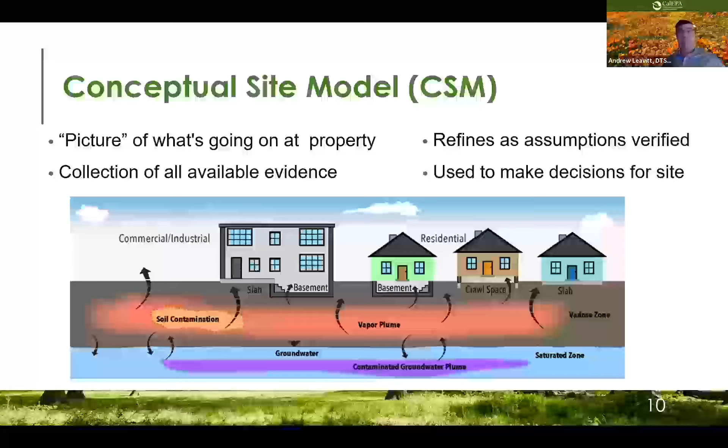So what should the cleanup process look like for a typical site when applying the holistic approach? Well, it'll start with the site investigation phase, using all the tools in our VI toolbox, which I'll discuss more in a bit, to collect the necessary data or lines of evidence, to more efficiently build a robust CSM and delineate the source area.

While complete characterization remains important, the holistic approach puts an emphasis on source area delineation so we can remove it and be more protective of human health. It also allows us to be more targeted when making data-driven decisions about monitoring well and probe networks, which can quickly deplete budgets and drag out project timelines.

Once the source area is delineated, we want to remove it. The methods of doing so aren't anything new. We're just trying to get there earlier in the project lifecycle.

We also want to put a greater emphasis on short-term mitigation measures to address more urgent concerns to human health, particularly during the investigation and source removal stages. When indoor air concentrations indicate their need, we've always taken these actions. We simply want to make sure the project teams are prepared to use these measures, particularly when something like sealing up a few cracks may greatly reduce human health risk without depleting a project's budget.

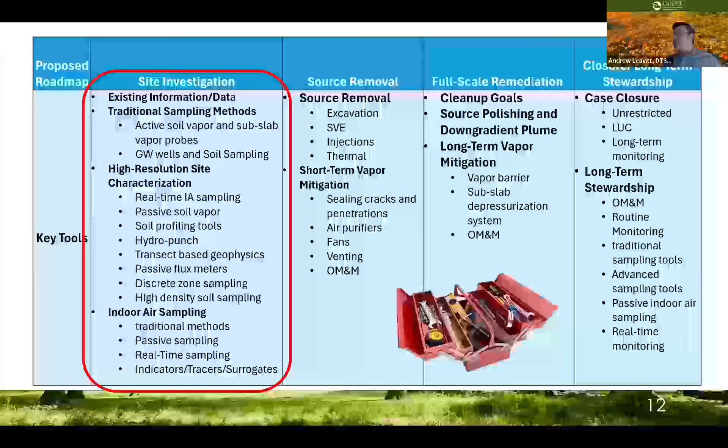While it can be expensive and has limited application for soil vapor sampling, real-time monitoring tools can be cost-effective and are great for evaluating preferential pathways, VI patterns like temporal variability, and differentiating between background sources and VI, which could answer why the mitigation measures weren't working.

When we look at source removal and full-scale remediation, none of these tools are considered new or advanced. These are tools that we've been using for years. We are simply trying to use them earlier in the process to be more protective of human health.

It can also be noted that many of the tools used for site investigations may also be used for long-term stewardship.

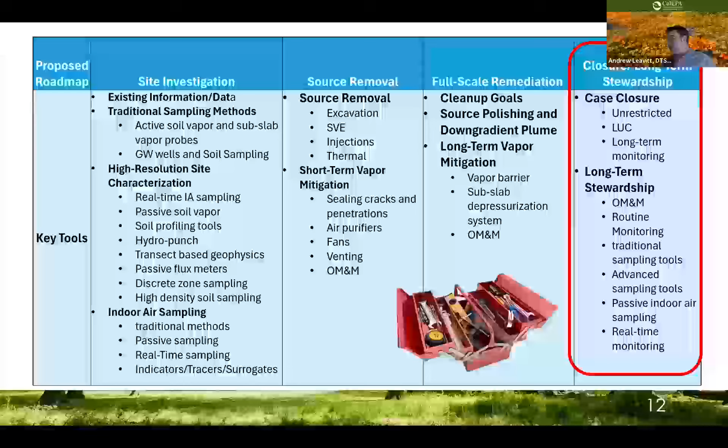I want to make it clear that we understand that every site is different, and therefore not all of these tools will work at every site. There are exceptions for every technology, but if we look again to the site investigation tools, for example, many of these tools will work at a large number of sites. The toolbox is vast and gives us options. We simply want to see the most appropriate tool chosen for the task at hand.

And I also want to note that a great source of information for evaluating VI is ITRC's recently published VI Toolkit, which a link has been provided for in the chat. Next slide, please.

So how do we build the robust CSM? Well, we use multiple lines of evidence. So lines of evidence, or LOE, are all of the data and information that exists for a site. Each LOE should be weighed based on relevance, or how much an LOE helps to answer the question being asked, representativeness, or does the information accurately replicate the actual conditions, and quality, or was the sampling or analysis performed using acceptable protocols.

The same LOE may be weighted differently for another site, a different building at the same site, other scenarios for the same building, like change of condition or operation, or even for a separate sampling event within the same building or same site. In other words, context is critical.

For example, you collect indoor air data in a building at your site. But how useful is that data?

Have you collected enough to account for both spatial and temporal variability? Have you collected paired sub-slab vapor data? If yes to both, your data may hold more weight. But if redevelopment plans have the building being demolished and replaced with a new one, that data holds much less weight.

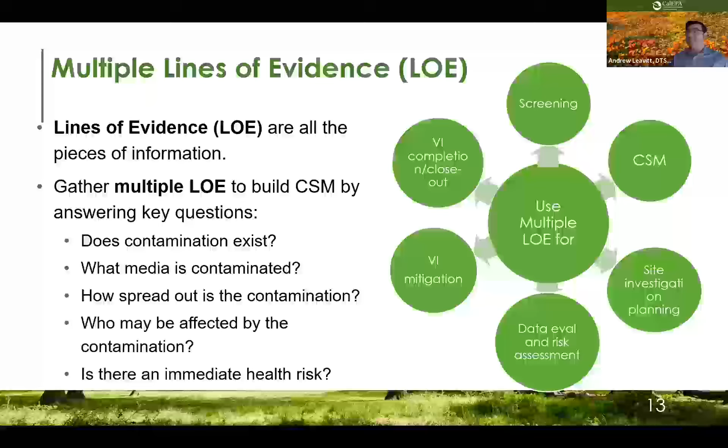As a CSM changes and gets refined throughout the entire lifecycle, so do our DQOs. The DQOs we establish first tend to be more broad. These are the big questions mentioned on the previous slide, like: is contamination identified? What media is impacted? How spread out is it?

Who's affected? As the project progresses and we meet these DQOs, additional, more specific questions must be established, like: is there a complete vapor intrusion pathway? Are there potential preferential pathways? What is the human health risk? What is the geology and hydrogeology of the subsurface?

One DQO that is important and interfaces with our risk-based decision-making process is whether or not to set a preliminary goal for indoor air, like a hazard quotient of 1 or some other defined risk level. To meet this DQO, we may initiate source removal and/or short-term mitigation measures, but it's important that this be done while continuing site characterization beyond the source area.

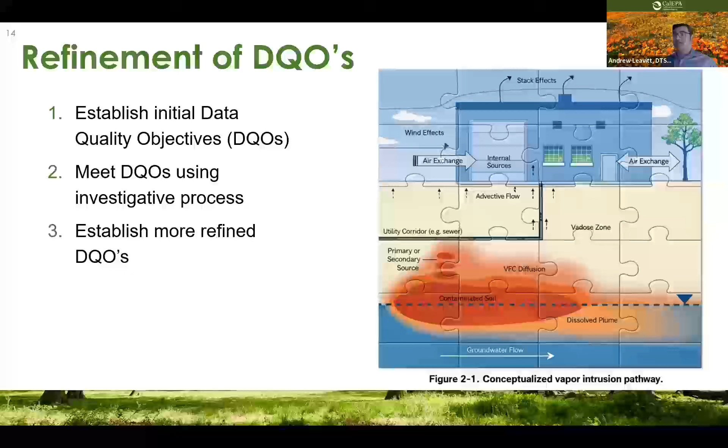To sum up, what are some best practices for a successful vapor intrusion case? Well, first and foremost, it's the application of a more adaptive approach to case management.

So we raid the VI toolbox, use the appropriate tools to collect LOE, and build a robust CSM. Then we use the multiple LOE approach with that CSM to support data-driven management decisions throughout the project's entire lifecycle. This will help achieve the goal of more quickly evaluating and addressing potential VI health risks in a more cost-effective manner. Part of that adaptive case management is optimizing early source removal to be more protective of human health and utilizing short-term mitigation measures to address more urgent risk concerns.

Next is engaging with the community early, often, and in a clear manner. Starting that discussion from the get-go may avoid major delays down the line.

For public stakeholders, we want to make sure communication is transparent and collaborative. This will help ensure that both regulators and regulated have a common understanding of the site, contamination, potential risks, and risk management actions that may be taken to reduce those risks.

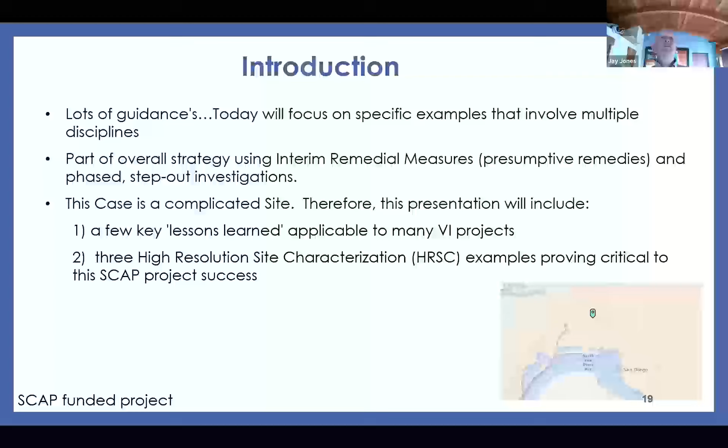All right, so the site's located in San Diego. We're just north of the airport. The dotted blue line you see there is where San Diego Bay used to be. All the land where you see the airport was hydraulic fill, dredged from the bay to make the bay more useful. So our site used to be next to San Diego Bay. It has some importance because this means this is really just a VI case only. We have non-beneficial use designation for groundwater, so we're not worried about drinking water. We really are focused here on VI.

Okay, so this is an example site. It's a former dry cleaners, kind of a classic case. If you work on dry cleaner cases, you'll see some of these come up from time to time. This one started in the early 50s, operated almost into the early 2000s. There were 2 dry cleaner locations over time within a building, and the building was expanded over time. A conspicuous feature of this site is that there was a 100-gallon above ground storage tank filled with PCE, tetrachloroethylene, used for gravity-fed dry cleaners, with disposal to floor drains. It was all legal, for many years. We don't have data on this, but it's also combined with a lot of conventional washing, so there's a lot of soapy water combined with the PCE over time. So we have pretty good historical data, which I'll go through in a minute. Early on, we suspected there was lots of PCE. Our initial estimate was about 2 metric tons, 4,400 pounds of PCE in the ground. After high resolution work, we estimated probably on the order of 6 metric tons. So it really tripled, which shows you the importance of the HRSC.

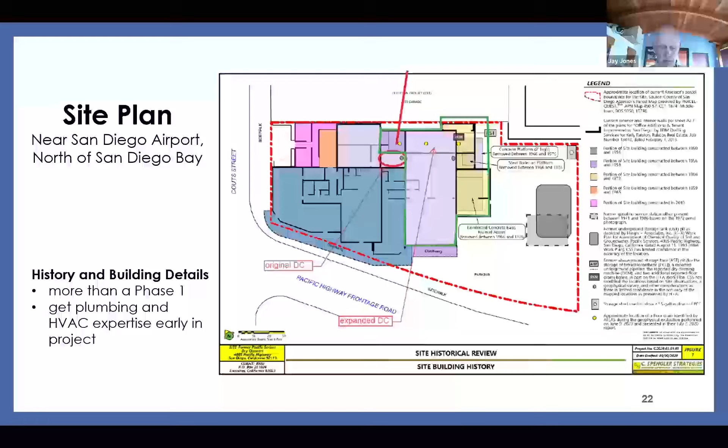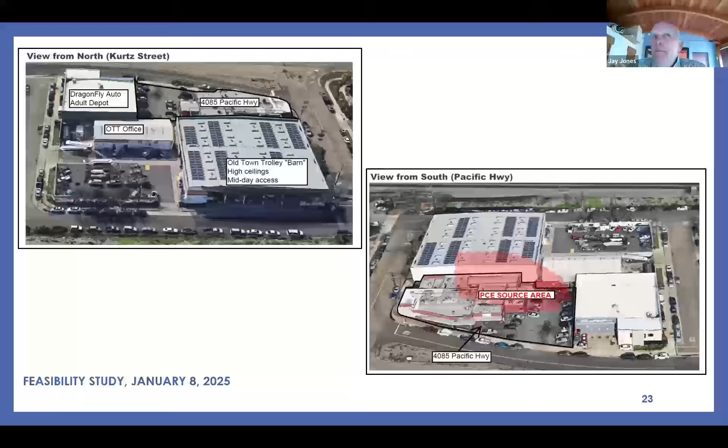All right, so here's a picture of the site. The lower right shows what we call the PCE source area. The building I just showed you is in the lower left corner. There's multiple properties on this block. We're involved with investigation, mitigation, and remediation on all the buildings on this property. I'm going to focus only on the one on the lower left today. You can see on the upper left the opposite version of the same picture. Really hard, very logistically challenging. That's fairly common in a lot of the sites I've seen over the years - we're dealing with an urban environment, and it can be quite difficult to logistically bring in drill rigs and do a lot of the work that we like to do for subsurface investigation.

Next. So here's a cartoon conceptual site model, give you a quick idea what's going on here. Two features of high level importance. First of all, on the top, you can see that we had a fairly extensive development of multiple dry cleaners, conventional washing and cleaning, and this above ground storage tank I mentioned to you. Sewer disposal - we've mapped out all the sewer lines, worked closely with the plumber to figure all that out.

Second key element of this is groundwater is at 8 feet. So groundwater is a key component of all our vapor intrusion investigation, because what's happening is you have dissolved phase PCE, it partitions into the vapor phase, and it acts as a long-term source for vapor intrusion. So we have to really consider groundwater in this case fairly carefully.

Good detail. So with depth, the 1, 2, 3, 4 on the left gives you an idea of what we're conceptually dealing with. One is an 8-foot vadose zone. Two, we have this thin wedge of an unconfined aquifer system - silty sand, sandy silt. Permeability is on the order of 10 to the minus 3 centimeters per second. Not super high permeability, but it is higher permeability than the next layer, which is a very dense, continuous clayey sand.

So between 5 and 25 feet thick. It is really low permeability, really dense. It has permeabilities on the order of 10 to the minus 4, 10 to the minus 5 centimeters per second. For reference, 10 to the minus 6 is a landfill liner, so it's really low permeability. Conceptually, what we found is that a lot of the PCE that came out of the tanks and the dry cleaning machines has traveled down into this and is pretty much stuck in this clayey sand.

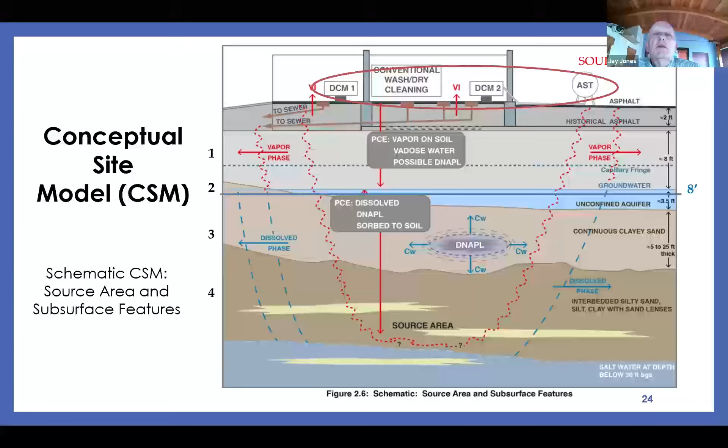So the concerns, again, it's non-beneficial groundwater use, so our focus is all vapor intrusion. I want to go through three of our lessons learned. Initially, when we got into this site, indoor air concentrations were quite high - we're in the hundreds of micrograms per cubic meter of PCE. Again, that's versus the commercial level of 2, so we're hundreds of times higher than it should be.

The three lessons learned I want to talk about are: one, what we can do just doing reconnaissance in the building and physically sorting out what's going on for vapor intrusion from a vapor conduit standpoint - looking at the ventilation systems in the building and figuring out what the operations are doing and how that affects VI. And then I'll talk about some of our initial mitigation and interim remediation work using both excavation and soil vapor extraction. Again, referring back to what Andrew told you - we can start early. We don't have to wait to evaluate the whole site. There are some things that are very obvious that we can work on.

So the first one is PID reconnaissance. The photoionization detector is a real common handheld device - just take it and go in the building. Take the history and building details and start scanning. Look for cracks, look for drains. Work with the plumber, figure out what's going on - the plumber can locate the pipes, you can do pipe inspection work, they can tell you how deep they are and where they are. Our goal really is to try to understand what happened and then what some of the potential vapor conduit pathways are.

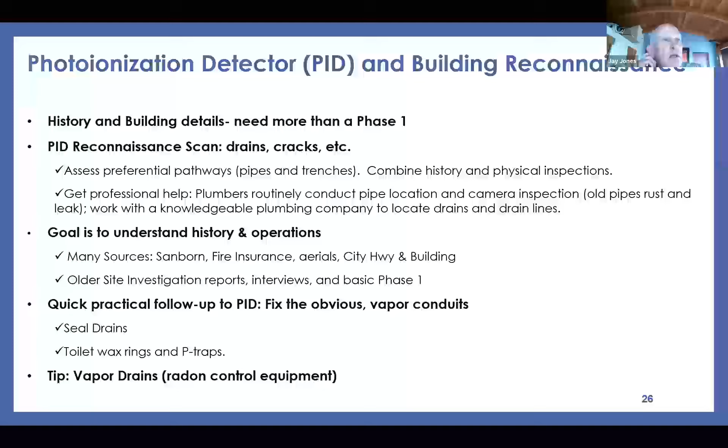So here's an example. This is the back of the old dry cleaner. We knew that there were floor drains - didn't see them, but then after pulling some materials out, lo and behold, we found a floor drain from the 1950s, still in place. The upper middle shows the PID registering 10,000 ppb - it was quite high in PCE. We got busy with the plumber, he got his tracing tools out, we tried to clean it out. We were really unsuccessful - the line had collapsed, but we knew we had a lot of vapor coming up.

So we were there, and the next day went to the metal shop and got a big plate and basically came in and sealed it, covered up that hole. That really did a lot to reduce our vapor intrusion problem immediately, just by using a steel plate.

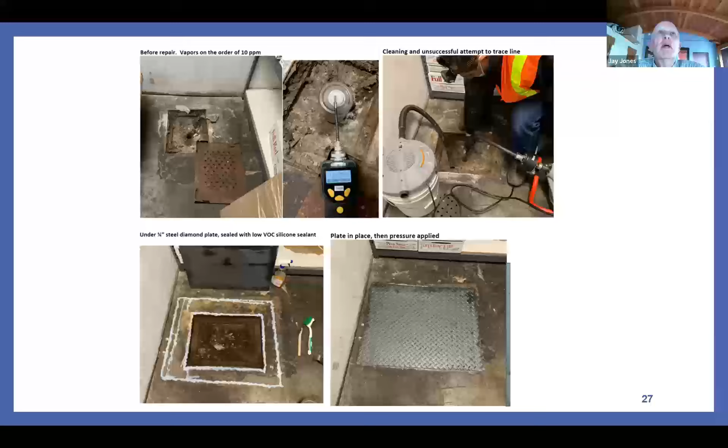Again, these are all locations that we sniffed out basically with the PID. So we were able to quickly mitigate multiple active vapor conduits. Again, why wait? We have people in the building - let's fix it while we can.

Another lesson learned, and I've seen this on multiple sites, is get a professional involved with the heating, ventilation, and AC. Fresh air is not optional. The California Code of Regulation Title 24 requires outside air for residential and commercial buildings. This has nothing to do with our industry of vapor intrusion - it's simply necessary for healthy air in a building.

Use certified air balance professionals. There are a couple certification agencies - use them. I've tried other folks, and they don't really know what you're talking about when you're trying to get detailed measurements of what's going on in terms of the HVAC systems. These all follow standardized engineering procedures and calculations. It's a well-established field.

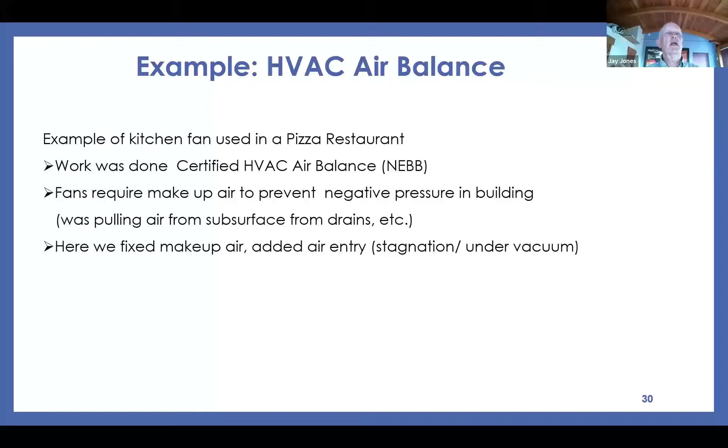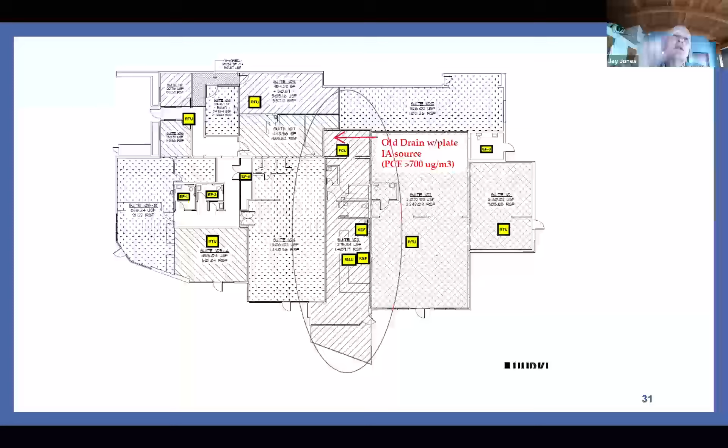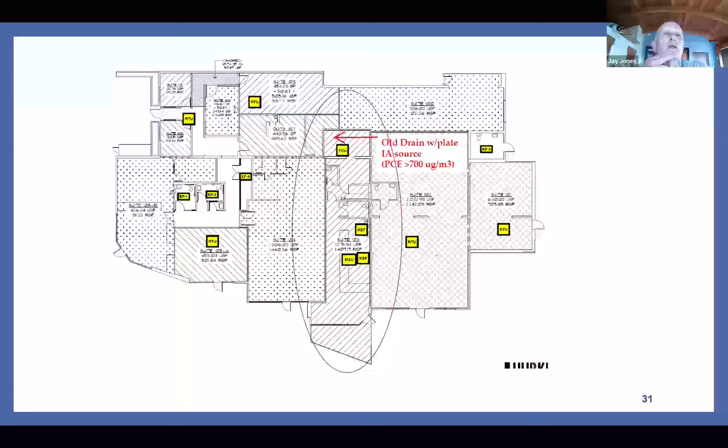Here's the drawing of it - this is a report from the air balance professional. The long skinny suite, the old dry cleaner plate was in the back, where the dry cleaner machine was located, and then in the middle is the kitchen. There's two symbols here: KEF and MAU. Kitchen exhaust fan is the fan used for their cooking equipment, and makeup air unit is the air that should be brought back into the building to balance out the kitchen exhaust fans.

So how did it go? We started working on this project in 2020. Before we got here, indoor air concentration of PCE in this suite was 730, and TCE was also pretty high at 5.7. We put in the plates and the vapor drains, came back and sampled the next month - it was 76. We thought, hey, we're doing pretty well. Well, comes July, we sampled again and it bumped up to 370. There's two factors here: one, we're coming out of COVID so there's more activity, and two, it was summer, it was hot, and I think that contributed to the increase in volatilization.

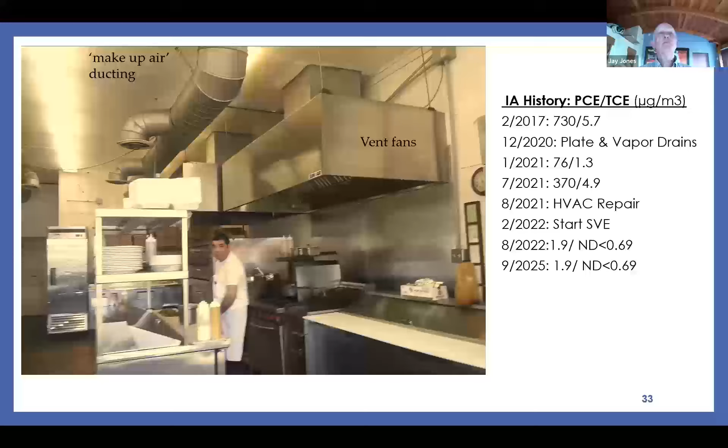Again, it's not too late - it's never too early. Just get busy, go back, revisit cracks, toilets, drains. Go back with the PID from time to time - it's cheap, it's simple, and it takes very little for the folks on site to just walk around with these. Fix the HVAC - this is a long-term fix, and the occupants need fresh air. I've found over the years that a lot of buildings don't have outside air exchange because it costs money to condition, heat, or cool the air, so a lot of these systems are plugged off.

If you just simply fix the HVAC, you can do a lot to restore healthy conditions within a building. Further, as you're getting into the projects, floor coatings would be helpful. And then over time, in a lot of cases, we're going to be looking at some sort of SVE. So start thinking about what you're going to do with that.

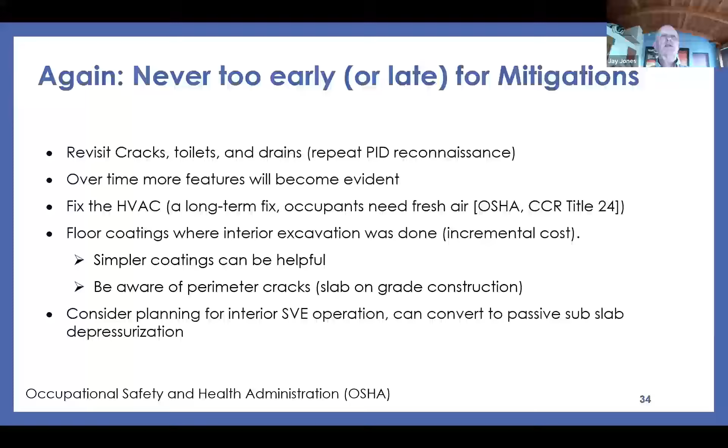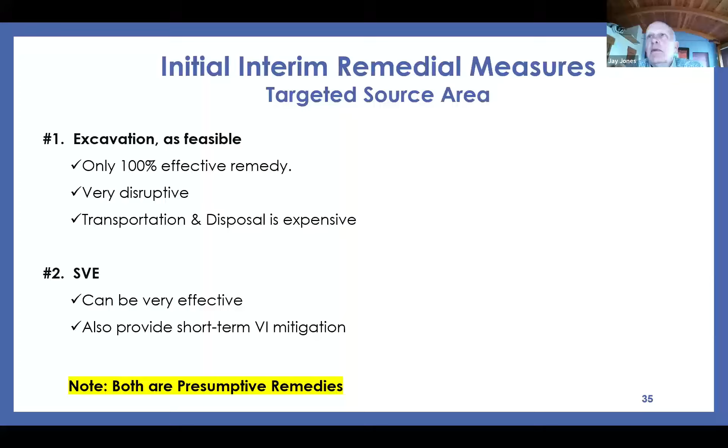When we got into this, we did some really quick action before we really had a full handle on the whole site, because we knew we had a really significant source area. So we did some excavation where it was feasible, and we also started planning ahead to SVE. Both of these are called presumptive remedies. This is an older term out of CERCLA, but basically it says we've done this enough, we know what we're doing, let's just proceed. We don't need an extensive study to determine precisely what remediation method is necessary. These things work, they're cost effective. Don't waste a whole lot of time trying to figure out what else to do.

So, excavation. We had a vacant suite. This was in the second dry cleaner, in the bigger operation that was expanded in the 60s, and we did it as feasible. The point here is be careful. Get a structural engineer to assess and guide.

It's very disruptive to be cutting holes in slabs, and you don't want to destroy the building trying to get after the soil. This allowed us, by digging some holes, to combine some multiple goals. So we were able to take these trenches we dug, backfill with gravel, set up an SVE system. We also were able to put in additional piping.

Something you always have in the back of your head is, what are you going to do for remediation? Remediation nowadays seems to be tending towards more in situ methods, either chemical oxidation or chemical reduction. They use liquid reagents, so if you can put some extra PVC pipe in the ground while you have a hole in the ground, go for it, because the extra PVC is actually fairly low cost.

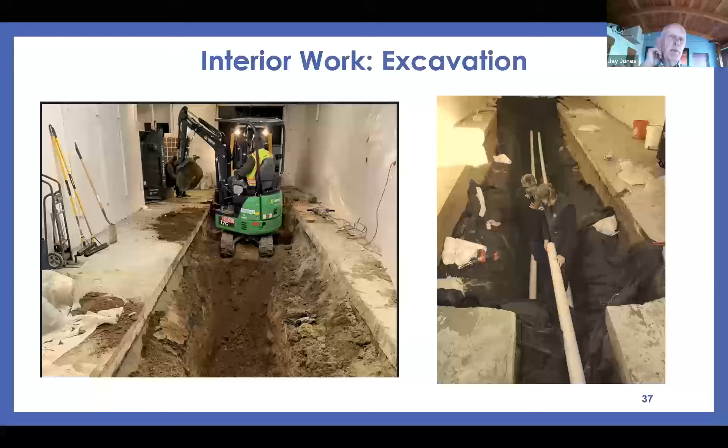We expanded this to the outside. The picture on the left, you can kind of see the cone there - that's the back door of that one suite we excavated. There's 4 SVE lines that came out of there. We also excavated on the outside. Just as a point of interest, we had a soil vapor point at a depth of 5 feet in this excavation. It came in at 13 million PCE, micrograms per cubic meter.

So we had really, really high concentrations. All this soil went off as RCRA hazardous. It was pretty stinky. And then on the right side, you can see this gang of pipes that we put in. A lot of piping, but once you have the trench open, get it set up.

Again, looking on the left, we set up additional piping as reserve piping, because we knew we'd have to at some point go and establish more SVE within the building. This allowed us the flexibility.

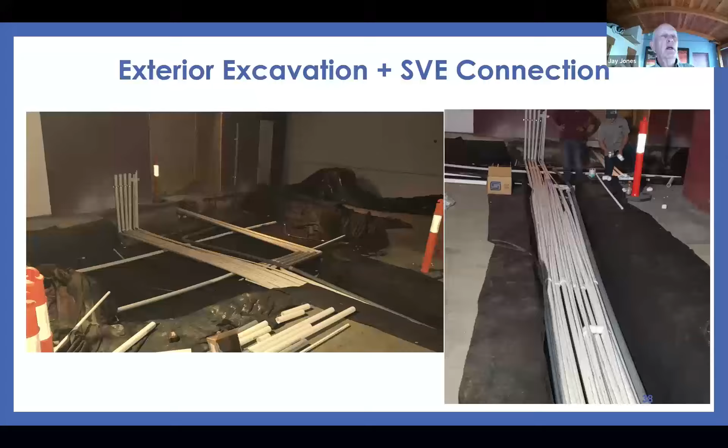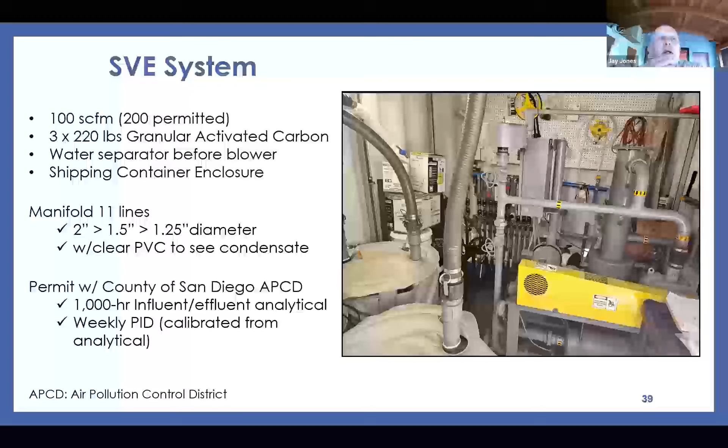So this is our SVE system. I'll just touch on this briefly. We're running 100 SCFM, we're permitted for 200. It's treated with three 220-pound, basically 55-gallon drums of activated carbon. It's got a water separator before the blower, and we put this into a shipping container. I will go through the details of this a little bit more later.

Over time, we had an opportunity to get inside the building and do some additional work. To date, we've recovered 2,000 pounds of PCE as vapor, and most of that's coming out of this Suite 100 and the two trenches you saw. We've been operating for a few years, and we feel these horizontal trenches have been really effective at PCE recovery. It also serves as mitigation, depressurizing the slab and helping indoor air.

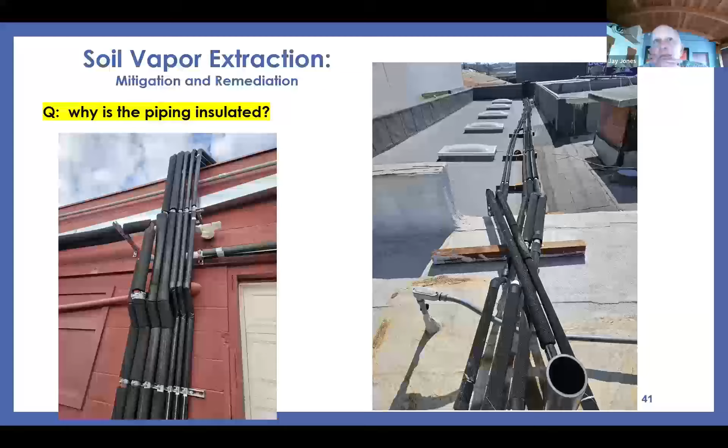Well, the reason is that it collects condensation. Soil moisture is fairly high in the ground, and these pipes, when they cool, will cause condensation. The water gets trapped, and the SVE is just not very effective. The point here is you can't see that unless you can literally see it, so install some clear PVC.

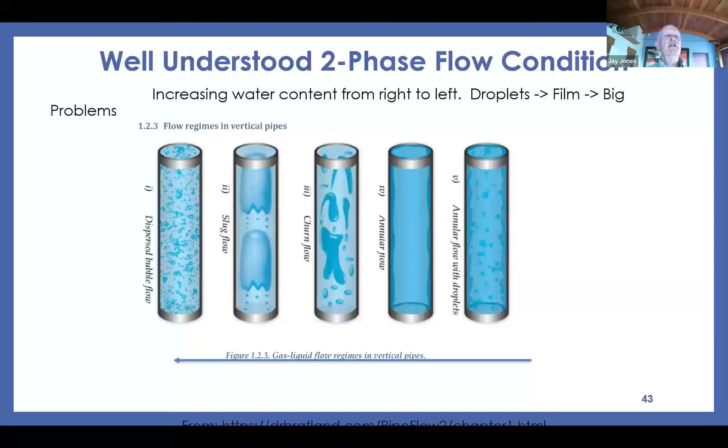If you could go back one, I can show you that example again. On the right, you can see the film, that's just a nice film, still running air. The next two examples, it's churning, with air and water bubbling along. The one on the left is fully full of water with diffuse bubbles. These really show you good examples of these various two-phase flow conditions.

Next. All right, so soil vapor is primarily water. I did a quick calculation: based on just 20 SCFM airflow, PCE at 10,000 micrograms per cubic meter, which is generally considered pretty high concentration, that's pulling 8 grams a day. Soil is moist, so if you take some basic assumptions and look at a condition with relative humidity at 90%, 65 degrees Fahrenheit, there's 1,000 times more water than PCE. We get around 11,000 grams per day, about 3 gallons.

Dew point is a critical consideration, what happens when you cool the pipe. This is why we insulate the pipe; we're trying to prevent the air in the pipe from getting below the dew point. When the dew point hits, relative humidity is 100%, and the water condenses. In this particular example, it occurs around 60 degrees Fahrenheit, and it starts to collect water.

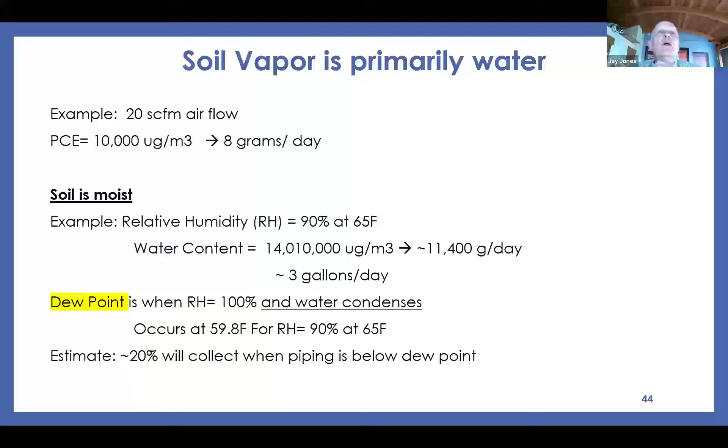Next. All right, so this is how we managed it. This is our manifold system, remember there's quite a gang of pipes. Every one of our lines has clear PVC, you can see that in the middle on the left. We're using small diameter pipe, 1 1/4 inch pipe. You need a high velocity to clear the water.

So what we do is purge weekly. We'll look in the pipe, and if we see water, we'll isolate that line and basically suck out the water as best as we can. It runs into the knockout. Another point to be made here is do not slope the pipe and drain it back into the ground.

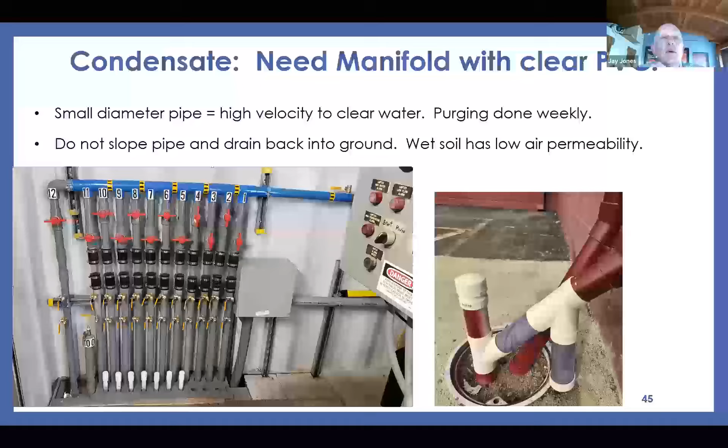All you're going to do, if you're collecting all this water, is it's going to flow back into your SV extraction point and make the soil wet, and wet soil has a low air permeability. It just runs counter to what you're trying to do, which is to pull the water and the other vapors out of the ground.

So our lessons here: first, make sure to work with the people who have hands-on experience at the building—the HVAC people, the plumbing, structural engineers, the excavation. I think it's hugely important to understand what's going on in the building as much as what's going on in the subsurface. The people really control what's happening in terms of the VI conditions in the building.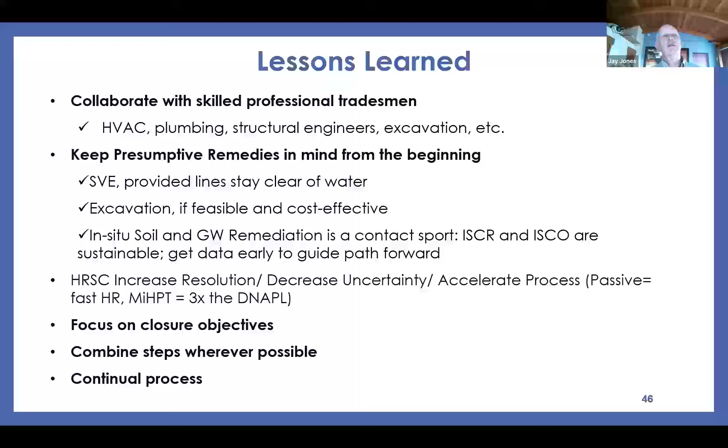Going forward, keep these presumptive remedies in mind: SVE, excavation, and in situ remediation is generally the path you're going to go. Then I'm going to go through and talk about some high resolution site characterization examples.

As Andrew pointed out, over time we've gotten better at this. The high resolution techniques really are improving both how we understand a site and also help explain and show, a lot of times, just better graphics to explain what's going on at the site.

Our subsurface investigation heavily relied on this high resolution approach. I'm going to show 3 examples. One is soil vapor. We have groundwater at 8 feet, so the groundwater condition is important to VI because you have PCE dissolved in water, partitioning and causing a vapor phase.

Historical point—and this is something I saw early on in my academic career—is that soil gas surveys were originally developed to map VOCs in groundwater. This is before anybody really cared about vapor intrusion. They were designed to map groundwater, so they're really helpful for that, especially if you have shallow groundwater conditions.

The second one I want to talk about is some groundwater profiling we used to assess our geochemical and hydrologic conditions. And the third, I'm going to go through and talk about the membrane interface hydraulic pressure tool.

This is a really excellent methodology. Again, this is something Andrew touched on—as you collect this data, you continually evolve your site understanding. The conceptual model really doesn't stop. In terms of writing things up, it might look episodic, but as you get more data, you learn more about the site and get a better understanding of what you're going to do.

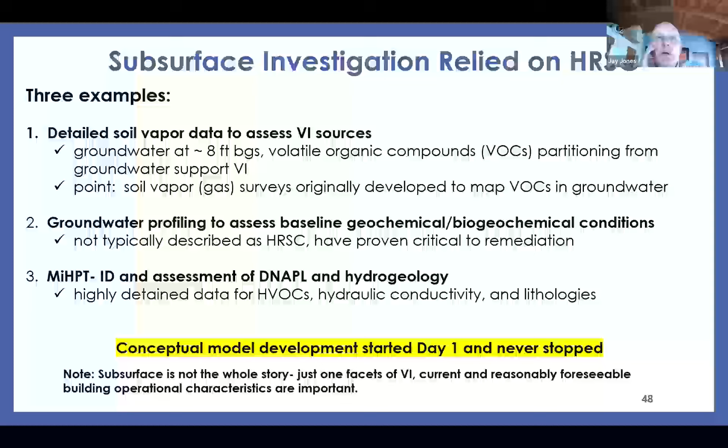So, first example: soil vapor. This is something Andrew touched on. You've got 2 options—one is traditional, called active soil vapor. You stick a probe at typically 5, 10, 15 feet, test it, remove it. It's fairly slow and fairly expensive.

The passive methodology, which is what we used here and worked really well—you can see the example on the right. You get these 2-inch diameter metal tubes, about 2 inches by 12 inches. Put them in the ground, drill a hole a little deeper to get some vapor moving in it, and put a sorbent media in. These sorbent media sit in the ground for maybe a week, maybe two, and the state of the science has evolved to the point now that these concentrations from the sorbent media can be converted to vapor concentrations.

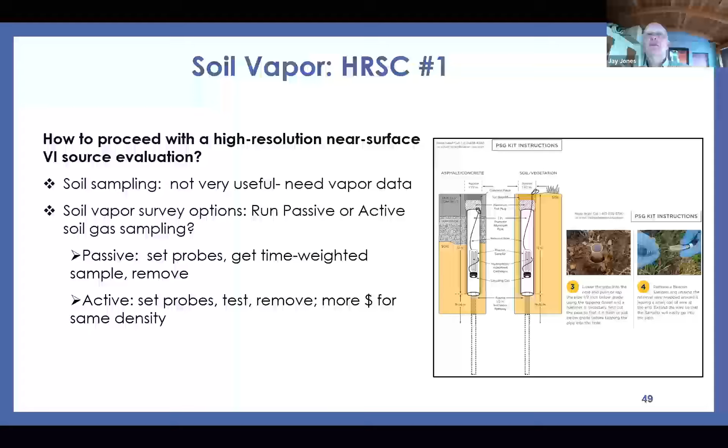So here's an example. The results come back and they actually speciate—so this is for PCE, this is our dry cleaner. Now, generally we've been drawing the drawings to fit on the page, so this isn't actually oriented north, the building's turned a little bit. But you can see this bullseye, and you can see pretty much where our dry cleaners were. There's a hole in the middle because we didn't have access, but essentially it created a very good bullseye.

Two points here: one, this is logarithmic contours, so it drops off fairly quickly. The concentrations we see here, the higher red, are under 500,000 micrograms per cubic meter. That's pretty close—similar to what we saw later when we came in and put the soil vapor probes in.

This took us 2 phases. It took us some time, but we did the first phase and said, we've got to keep going. The nice thing is, most of these points were done inside the building. It just takes a rotary hammer and a few minutes to install these points, and we're able to do it fairly quickly without working around people too much. All these suites and businesses are occupied.

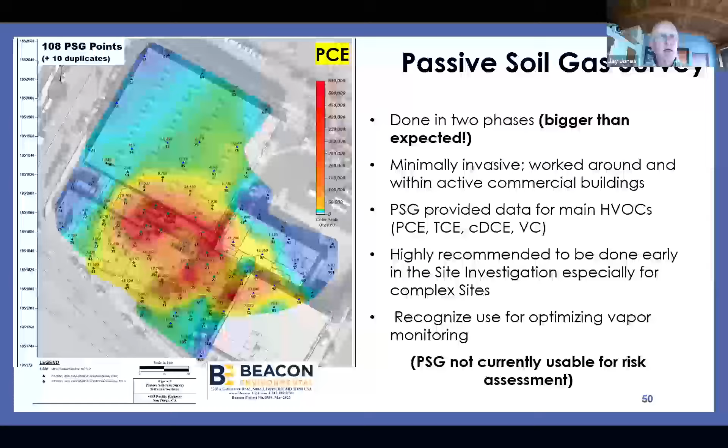I want to touch on this quickly. This is in situ geochemical profiling. I'm calling this high resolution — I haven't really seen this done elsewhere, so I just wanted to throw this out here.

When you do low flow sampling of a well, you usually set up a flow cell and run the water through it, measuring temperature, electrical conductivity, dissolved oxygen, redox, and pH. You wait for it to stabilize before you take your sample. You can take this same tool, put it on a cable, and drop it down a well. This is what we did, and it gives us profiles and understanding of all these parameters in the ground every time we've done sampling.

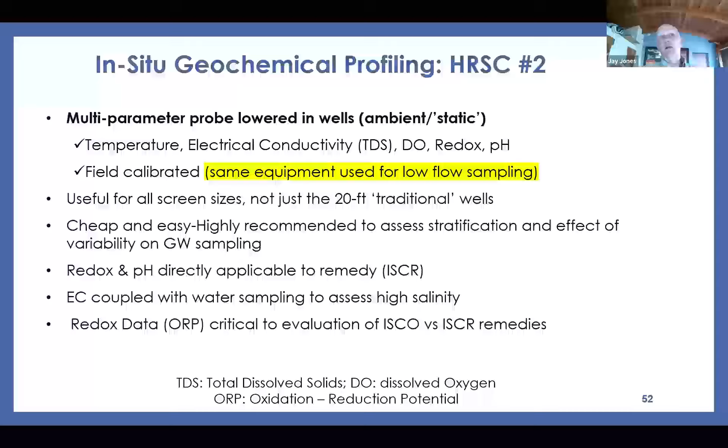Going back to the conceptual model, we had the shallow aquifer condition and a deeper zone. Our shallow wells are targeting the shallow unconfined aquifer, and the deeper wells are targeting the zone below the clay sand, because the clay sand is basically impermeable, so there's not a whole lot of use in putting wells in it. You can see that it really gave us a lot of data.

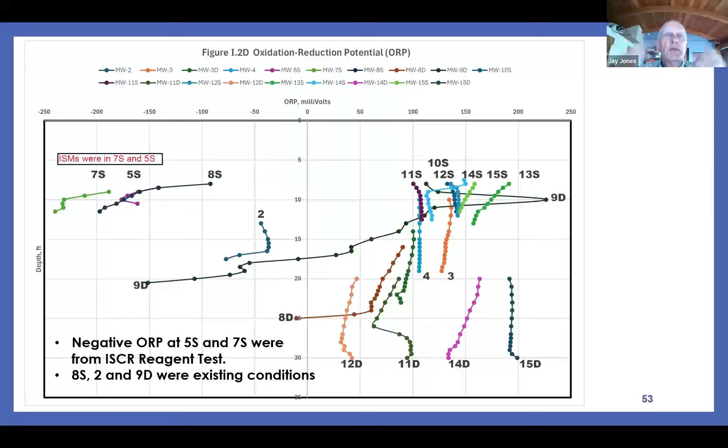We've used this to our advantage going forward to see how conditions have changed. We've gone to in situ chemical reduction for our groundwater remedy, and we've been using these data to attest to how much reaction we're getting.

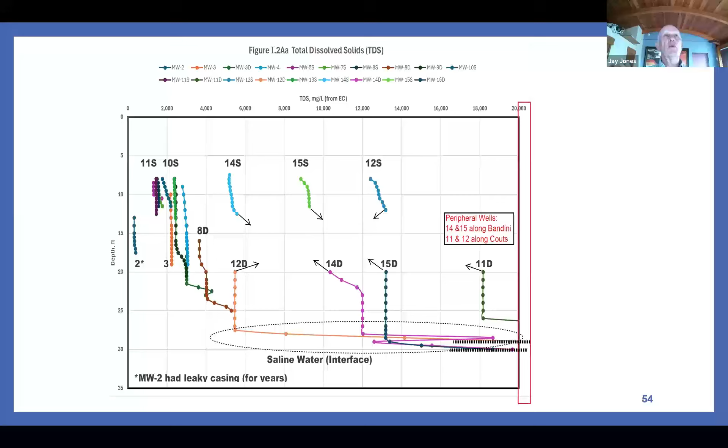And it's a really good way to try to assess what your groundwater conditions are with depth and laterally.

Okay, so I want to close out with the membrane interface hydraulic pressure tool. Now, this is a really good tool. I would say up front that without this, we really couldn't have done the work we did.

It really helped a lot. We did it in 2 phases. We worked inside and around all these active buildings. The tool provides basically 3 types of data.

One is in situ VOC profiles. Second, hydraulic conductivity - it tries to squirt water into the ground and measures the pressure and the flow, so it gives you an idea of the hydraulic conductivity. And then it's got a little electrode array, which is a geophysical methodology for getting electrical conductivity of the formation. So it's a function of porosity, electrical conductivity of the fluid EC, and some of the clay content.

Again, it has a hydraulic pressure tool. So what it does is it tries to squirt water into the ground, and runs up to about 110 psi. So it measures the pressure and flow, so it can calculate hydraulic conductivity.

The membrane is a heater, so it's a heating pad. It boils off the water, and as it boils it off, creates a vapor. It has nitrogen carrier gas, sweeps that back, and runs into a series of analytical machines.

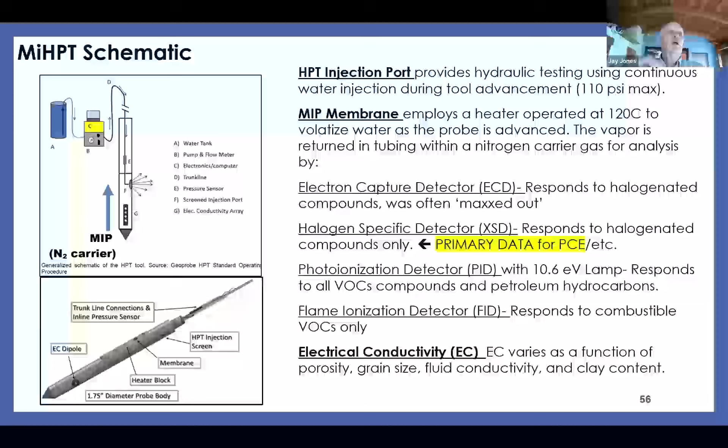So it gives us kind of a lithologic log. It's a very well-built tool. It's been used, oh gosh, I'm guessing now easily 10 years now. So it's well developed. It's complicated, so you got to get a good contractor to get good results.

So I'm going to go through this and explain what we were able to do with this. So again, here's the conceptual model on the right, just to remind everybody. So you got groundwater at 8 feet. You got this little thin lens of unconfined aquifer. You got this clay sand, this low permeability clayey sand, and some deeper material.

So we're able to use these data to actually map these surfaces - the top of the clayey sand, the base of the clayey sand, and the saltwater interface, trying to get a quick idea of what's going on.

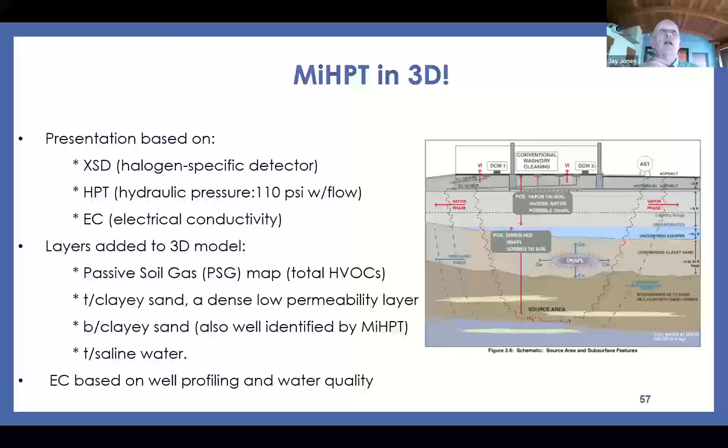So this is what we did. We used the soil gas data, so the passive soil gas data, to kind of target and design what we did, plus access - it's really hard to run these tools inside the building. You need a dolly-based LAR rig. It's tricky, plus you're on a cable, so logistically it's quite a challenge, but it's worth the effort. We did 41 borings, maximum depth about 36 feet.

It's pretty interesting because you can get a sense of really what's going on in real time. And if you put it in terms of the conceptual site model, you're learning a lot every day. So it's been a great tool.

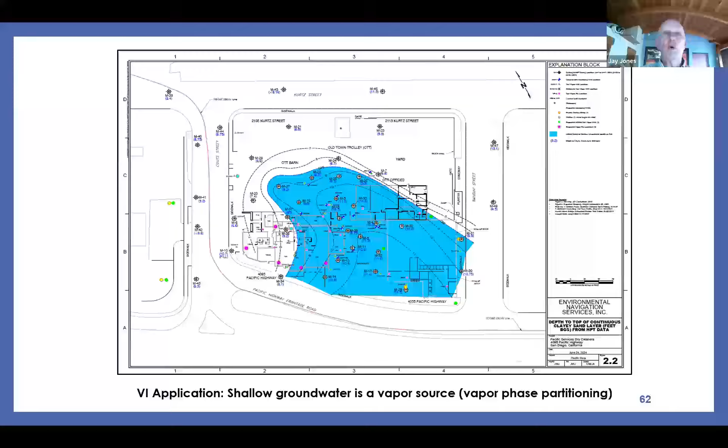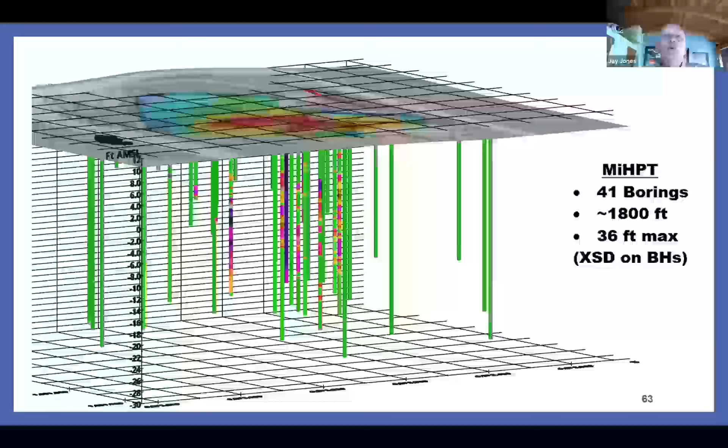So let's go to 3D. These are the borings, this is kind of looking to the north. You can see the PCE soil vapor map on the top - our red is our source area, the colors indicate where we had high responses. Again, we're going to focus on the halogen specific, the XSD tool. Okay, so this is our boring map.

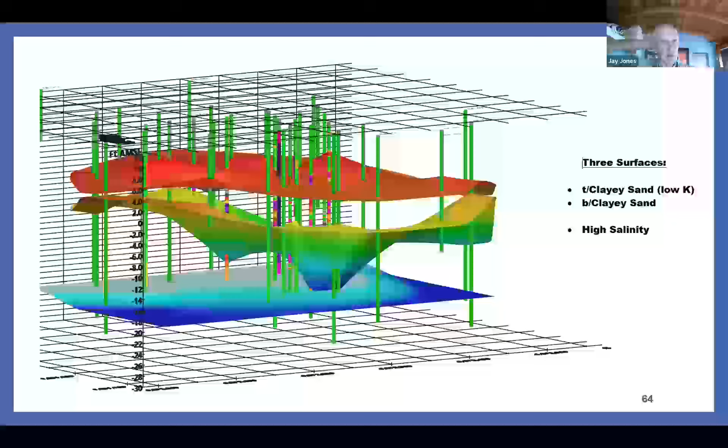Okay, so now we're able to pick off the tops. The red is the top of the clayey sand, the next one is the base of the clayey sand, and the blue one is the top of the saline layer. So again, this is the conceptual model, now in 3D, and hopefully this gives you a better idea of what's going on.

Now we're able to take this expert rule: anything over 200,000 microvolts in XSD is where we suspect we have PCE. So you can see the purple guy, we call him Barney. Barney is the main part of our PCE release, and it makes sense — Barney's pretty much underneath the above ground storage tank and some of the dry clean machines. So it gives us an idea of the extent.

Now, it's not fully saturated, but it tells us the envelope we can look at. Over time, again, we're looking at VI. The concern is that if Barney keeps bleeding off, it's going to continue to contribute to groundwater, which can contribute to vapor phase, which will contribute to the indoor air problem. So this became another element we really have to address on our remediation side.

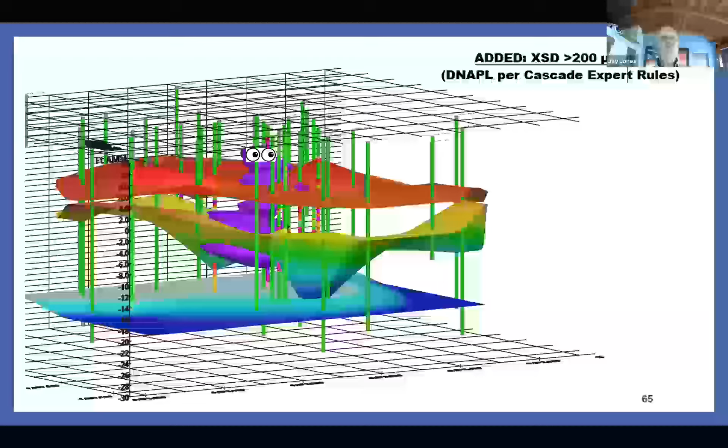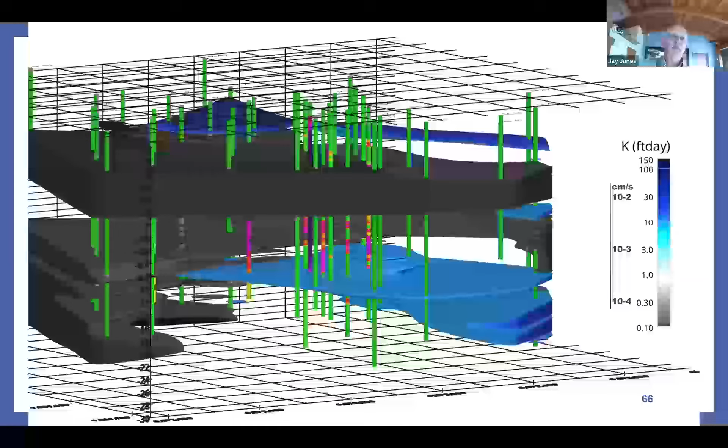And these diagrams you can spin and flip and look at in three dimensions. If I had time, you could have seen a whole bunch of interesting slides and movies. So what I want to do now is go through and use the XSD to give an idea how the plume evolved over time.

So the highest XSD, greater than 500,000, we saw in that one boring. That was where a lot of that was. So this is the highest concentration. Now I'm going to roll through and decrease the sensitivity of the machine to start saying, okay, where are we getting not only PCE free phase, but the dissolved phase. So this is the highest portion, the highest concentration within our buddy Barney.

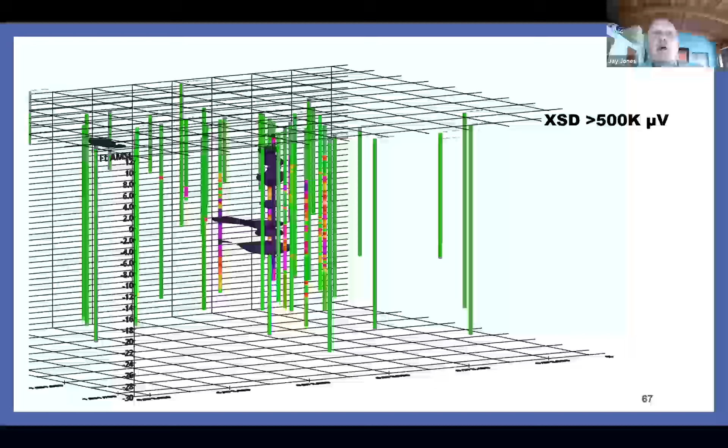Now you can see Barney is about 500,000. So this is the envelope where we think we have most of the free phase.

Now we're starting to get out in the dissolved phase. It makes sense — we have the free phase starts to dissolve, creates a dissolved plume.

Get to about 50,000 — this is put in red here, just to give you a sense of where we're at. This is the top of the clay sand. Material got down into it and spread out to a certain degree.

Now this is the same blob, but now we're looking at the base of the clay sand and the salinity layer. So we're getting a pretty good sense of how this plume has evolved over time. And again, this is decades — this release ended 25 years ago, so this data is telling us what happened for the last 25 years since the release.

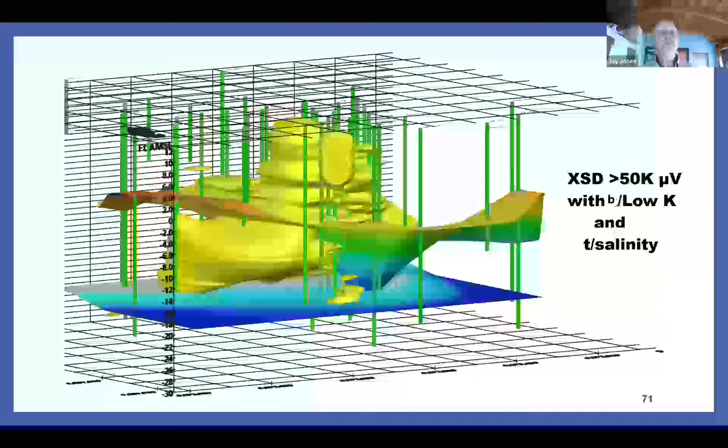So here's the last picture of this. You get a sense looking at a direction — we have Barney, Barney's head is pretty much the release area. It got into this clay sand and pretty much stuck, and some of it got out. So it gives us a real clear idea of how we could take that initial conceptual site model and put it in three-dimensional view.

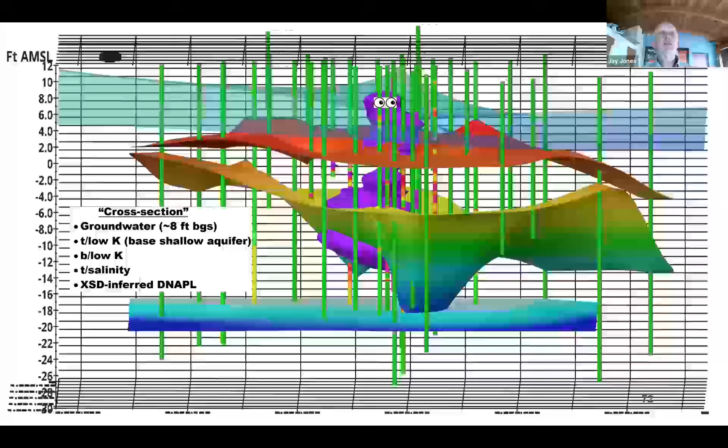So the results really helped us a lot. It clearly helped map out the vertical and lateral extent of the HVOCs. We can clearly see the DNAPL release in the source area. It allowed us to collect a lot of data without tremendous lab expense — the analytical burden of trying to do this with continuous coring and sampling would be tremendous.

One point here, we got a kind of lucky location from two regards: one is non-beneficial groundwater use, but the other was that the low permeability conditions have limited the DNAPL mobility. So in some respects, if it had not been for this low permeability material, who knows how big this plume would have been.

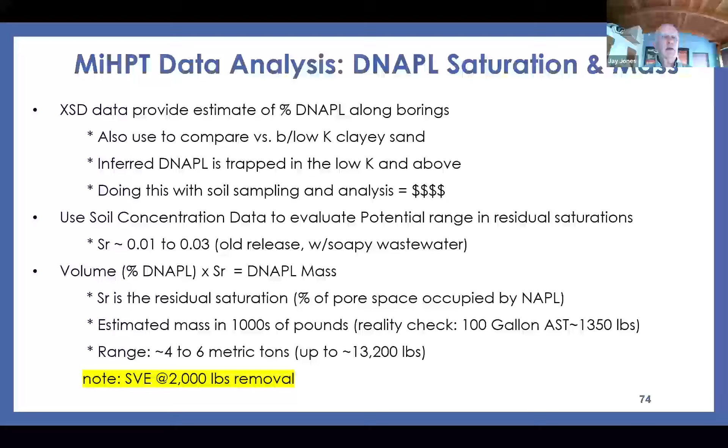So we can actually take some of this data and analyze how much DNAPL saturation and mass is in there. We're able to take the XSD data and compare it with soil concentration data. What we found, the take-home on this, is that the residual saturation — how much PCE is in as a percentage of the pore space — was really quite low, 0.01 to 0.03. Doesn't mean a lot of mass, but it tells us it was fairly low, which makes sense because it's an old release, a lot of soapy wastewater. And then we could take that estimation to come up with a volume calculation of how much is in the ground.

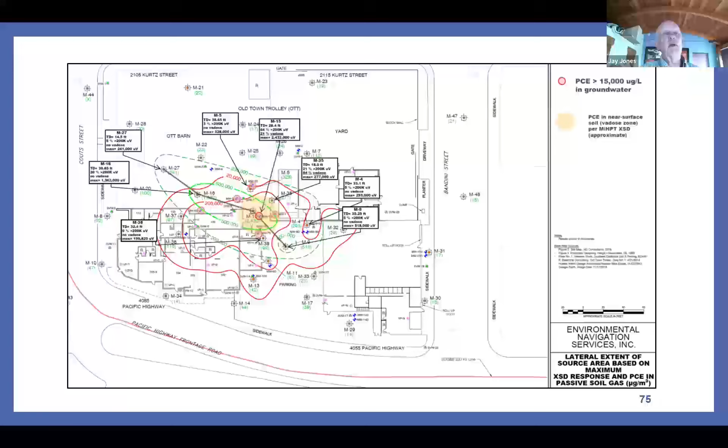So here's a map that shows the red shows the soil vapor, the green shows MiHPT data. It's interesting, these two were not exactly the same. The reason for this is that as the release got into this upper unconfined zone, it started to spread out, but where it didn't, it went straight down. So there's a juxtaposition of the surface versus the deeper expression, which was important in terms of going forth with remediation.

So if you take the logs and play around with the data, you look at the XSD response in terms of various thresholds, you can get a sense of how much is in the ground and how intermittent it actually is observed. So two borings dominated, this M15, which is the first one I showed you, and there was one next to it, M16, where most of the highest concentrations were located.

But if you screen those out in the middle panel, and look at the XSD about 150,000 to increase the threshold a little bit, you get a sense of where we're seeing little stringers of high concentrations of PCE. Now again, this is not vertical, this is just where it intercepts, and this is how the histogram works.

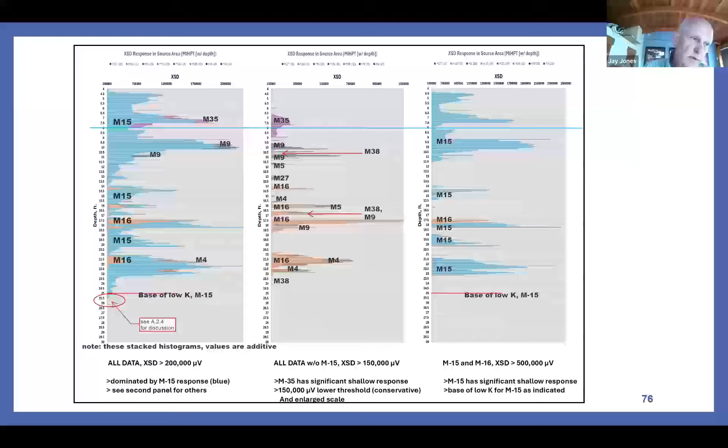And then on the right panel, we can show where the highest stuff is. A lot of it was just this M15. M15 was located just about 3 or 4 feet away from the above ground storage tank.

Okay, so the top, we just run through some numbers here. So if you look at PCE saturation and compare it to what theoretical mass concentration would be, concentration by mass, saturation of 0.01 gives us a result of about 2.25 million micrograms per kilogram. 0.03 runs it up to about 6.7.

We compare that to our soils data. The maximum we ever saw, and we do have a lot of soils data, was about 7.3 million. So that tells us these bounds, the upper bound and lower bound, are probably reasonable, that we're looking at residual saturations about 0.01 to 0.03.

So if you do a very simple cylindrical assumption of area and mass, and use these percentages, if we look at the interior, which we call 500,000 and greater XSD response, we get about 0.03%, you use 0.03 for that area, and then exterior use 0.01. We came up with about almost 14,000 pounds of PCE. So this really helped us refine what we have in terms of the total mass, and also tells us we had a pretty big problem.

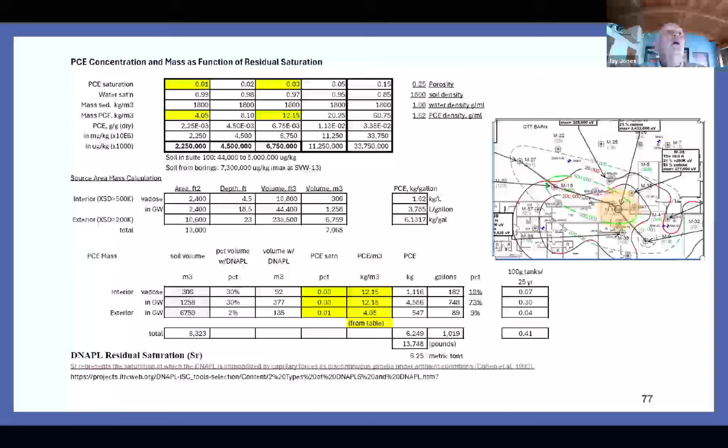So again, the benefits of this, and Andrew touched on quite a bit, is that these high resolution data are basically essential. We could not have done this without this HRSC. It really does help. The folks we're working with here at the local water board really appreciated these visualizations, and it really helps explain what's going on, and it does help focus everything on going forward in terms of what we're going to do for remediation.

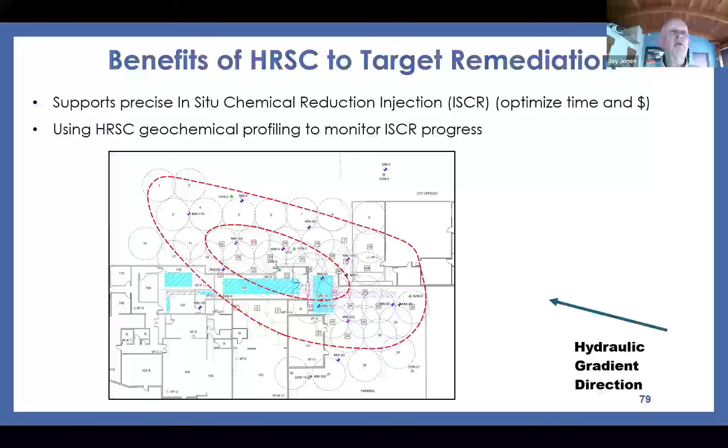And here's just to give a quick benefit. This is our injection design. Again, it was completely based on the high resolution data. It really supported it. And then we're also using these groundwater profiles to monitor the progress.

So in closing, this data was critical. We couldn't have done it without it. And that M15 example really fundamentally changed how we looked at the site and what we were going to do for remediation. It really opened up our eyes. The passive soil gas is very efficient, really helpful, and helps us put in later designs for vapor pins and fixed points. In summary, this early investment really improved how we understood the site, the conceptual site model, and truly reduced the uncertainty. The bottom line of this, it probably saved us hundreds of thousands of dollars on the remediation side.

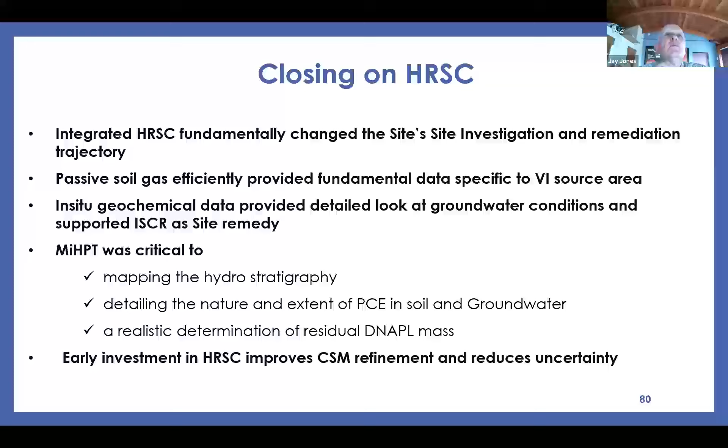So I'm Saraswati Paudel-Acharya, I go by Saru. I am Water Resource Control Engineer here at State Water Resource Control Board. Great job, Jay, I really appreciate you so much for presenting the case study in today's workshop. Hopefully there were some really good takeaways from the case study.

So the Site Cleanup Sub-Account Program is a funding program established by the legislation, Senate Bill 445, and written into a Health and Safety Code in 2014, which allows the State Water Board to issue grants for reasonable and necessary cost associated with projects that investigate and remediate the source of surface and groundwater contamination. Next slide, please.

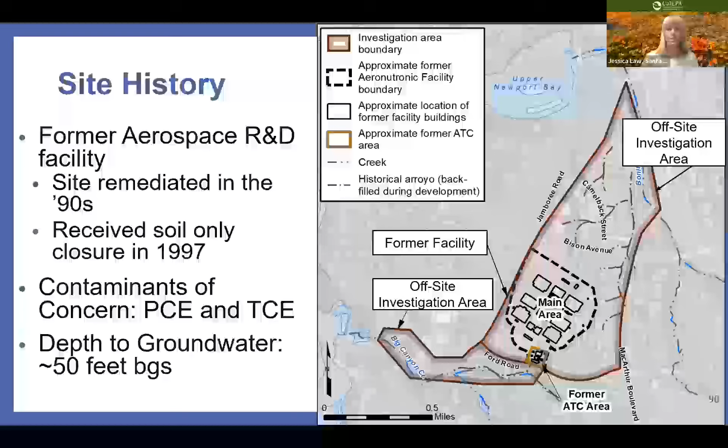Next slide, please. So this site is one of those with a long history. The facility operated from the late 50s into the early 90s. When operations ceased, the facility was demolished and environmental investigation and remediation was conducted. Then in 1997, 96-ish timeframe, the site received a soil-only closure, and this allowed the site to be rezoned from industrial use to residential use. Redevelopment began shortly after that, and that's when the primary focus shifted to impacted groundwater offsite.

Now, over the years, there's been advances in science and changes in regulatory screening levels. The EPA published the TCE action levels in 2014, and the environmental screening levels were updated accordingly in 2016. So in 2017, the Santa Ana Water Board requested an updated conceptual site model for the site. It was this updated CSM that reevaluated the historical data and identified the need to evaluate the site for vapor intrusion, and the vapor intrusion investigation began in 2018. Next slide, please.

Since one of the site's contaminants of concern is TCE, with those short-term exposure risks, as a regulator we wanted to ensure a complete vapor intrusion investigation path forward was laid out prior to beginning the investigation. This allowed for an adaptive process, making data-driven decisions. Decision flowcharts were included within the work plan, prepared for both residential and commercial properties, allowing the investigation to continually move forward without requiring extra steps, since they were already anticipated and laid out.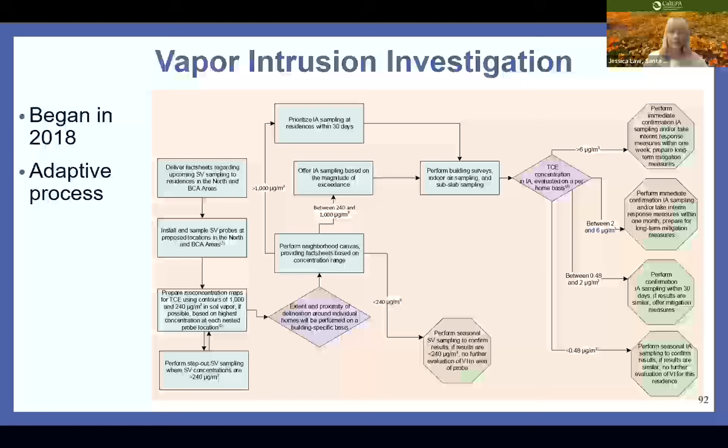Now I would like to discuss some of the details of the investigation. It's a busy slide with a lot of information, but I do want to use the investigation summaries and this figure on the right to explain the magnitude of the investigation.

First, just to give an idea of size: at the center of the figure is the former facility, outlined in blue, which is 98 acres in size. The shaded area is located at the central to northern portion of the figure, and that shaded area south of the former facility represents properties where buildings should be evaluated for vapor intrusion based on soil gas exceedances. Green would be residential properties and blue is commercial.

I mentioned a few slides back about the site having some unique features that contribute to contaminant transport. One of those items are the historical arroyos, which groundwater impacts tend to follow. The large soil vapor plume mimics the groundwater plume, which follows one of these arroyos, while the southern groundwater plume follows one of the buried arroyos. There's not a soil vapor plume associated with it.

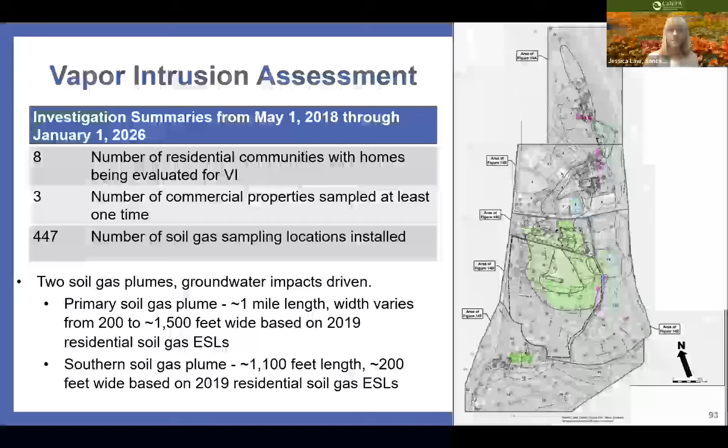For the indoor air investigation, there are 622 homes that have been offered indoor air sampling. Of these homes, 415 have been sampled at least once, and these homes are located within those 8 residential communities. One thing I'd like to note regarding the indoor air investigation is that with so many residential homes being evaluated, homeowner privacy was a big concern and of great importance to everyone involved in the investigation, but especially the homeowners and tenants.

But it was also important that the reports provided the indoor air results. Therefore, non-descriptive property IDs were assigned for each home, and only the project team has the key. This was the best approach for this project to be transparent about the results while maintaining homeowner and tenant privacy.

For communicating the indoor air results, those are sent separately to the homeowner or tenants. The indoor air results as a whole are included in a tabulated table in the routine monitoring reports.

Public outreach has been a large component of the vapor intrusion investigation. I want to touch on it briefly because community engagement is incredibly important to us. It's written in the regulations, and it is included in step 3A of the supplemental guidance. Public outreach, community engagement is incredibly important, so I want to emphasize that.

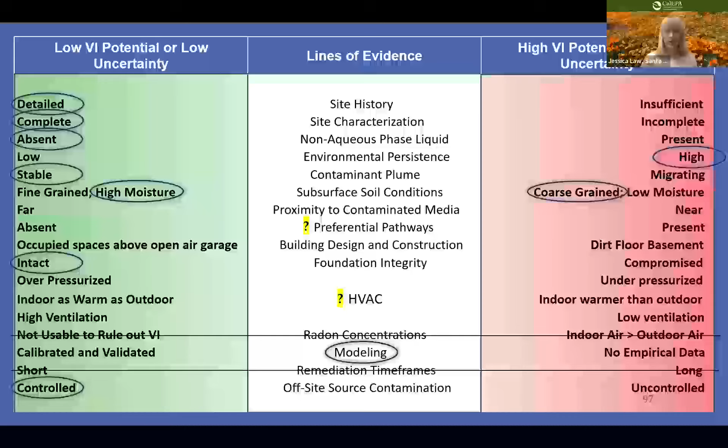Next slide, please. Okay, so the first scenario I want to go over is when we have subsurface concentrations that exceed screening levels, so indoor air sampling occurs. The indoor air results are below the laboratory reporting limits during both seasonal sampling events, so we were able to conclude no vapor intrusion is occurring and current risk is below the point of departure. Now, for future risk, we look at the existing soil gas concentrations, which are modeled to evaluate the risk, and then risk management decisions are made based on those results. This has been the approach for all buildings within the indoor air investigation area.

And I know there was a question off of the last presentation: when is that temporal sampling enough?

And it really does have to do with the subsurface results, the future risk. Was the indoor air concentrations below reporting limits? Was there some detections, but below the risk thresholds? So these are the questions we're asking and looking into, utilizing the multiple lines of evidence.

The next scenario includes when you have subsurface concentrations that exceed screening levels. For this home, indoor air results identified TCE in indoor air at concentrations up to 16 micrograms per cubic meter, which exceed the TCE action levels.

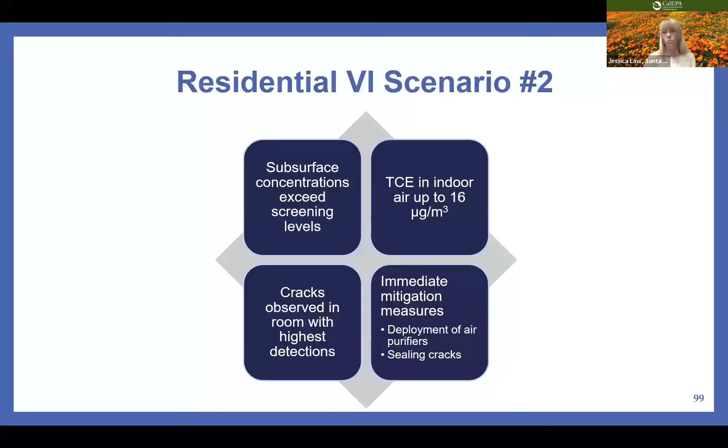So for this home, let's first talk about these short-term mitigation, short-term solutions, next steps. The room with the highest detections was in the garage, but it had been converted to a playroom, so it was actively used by the family.

The air purifiers were able to reduce the indoor air TCE concentrations to below the action levels, but there were still some exceedances of the long-term screening levels.

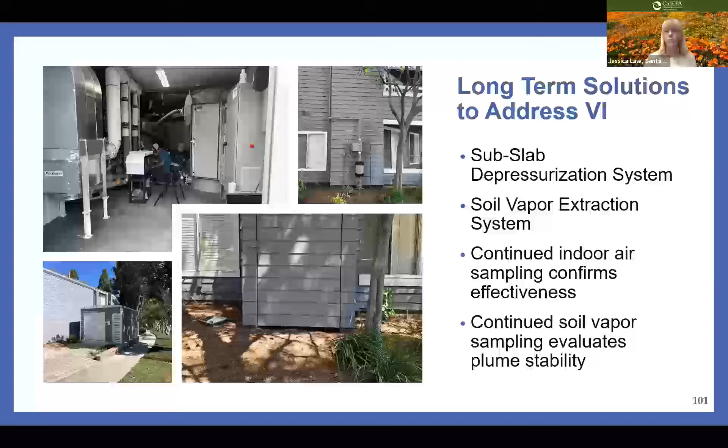The third scenario covers a situation where additional lines of evidence were needed to support the conclusion. We had subsurface concentrations exceed screening levels. In this case, it was for PCE, and indoor air results exceeded the screening levels also for PCE.

The building-specific attenuation factor was consistent with the site-specific attenuation factor and data collected using traditional sampling methods of canisters for indoor air samples and grab samples for soil gas. So we concluded that vapor intrusion was occurring because the building survey had not identified an indoor air source.

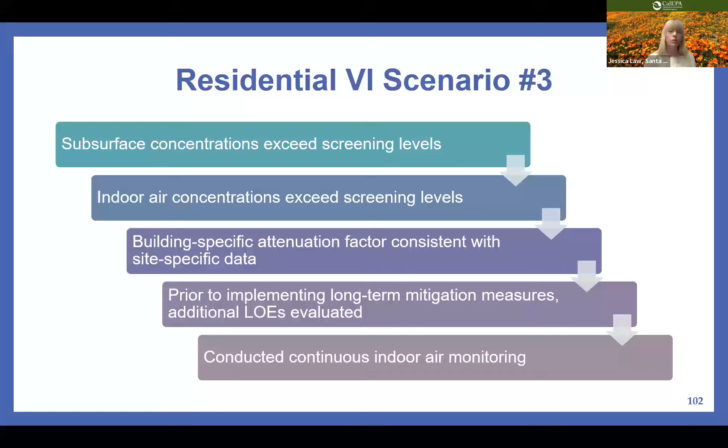Therefore, we did request that the RP move forward with long-term mitigation measures while longer-term remediation plans were being evaluated. But prior to moving forward with implementing a long-term solution, the responsible party requested collecting additional lines of evidence to confirm vapor intrusion, which we approved, and they conducted some continuous indoor air monitoring.

So before we talk about the continuous indoor air monitoring, I just wanted to show the site and building specific attenuation factors and why we had originally concluded that vapor intrusion was occurring. Since there's such a large data set for this project, the site specific attenuation factor is the 95th percentile value.

And these results are also why we continue screening each individual building. The building-specific attenuation factor, in this scenario, we just calculated the average for this particular home where this scenario had occurred.

For this community, the foundations are post-tension support, so there's no subslab probes, which is why we don't have a building-specific attenuation factor for subslab to indoor air. Now, for other communities, we do, and that's how that was developed for the site as a whole.

I do want to point out that I have heard post-tension support foundations tend to have more intact foundations, but on this project, the communities with the post-tension support foundations are where we have seen the most vapor intrusion. I am not saying that is what's contributed to it, but what I am saying is this is why it's important and necessary to screen each building and not solely rely on assumptions, but instead make data-driven decisions supported by multiple lines of evidence.

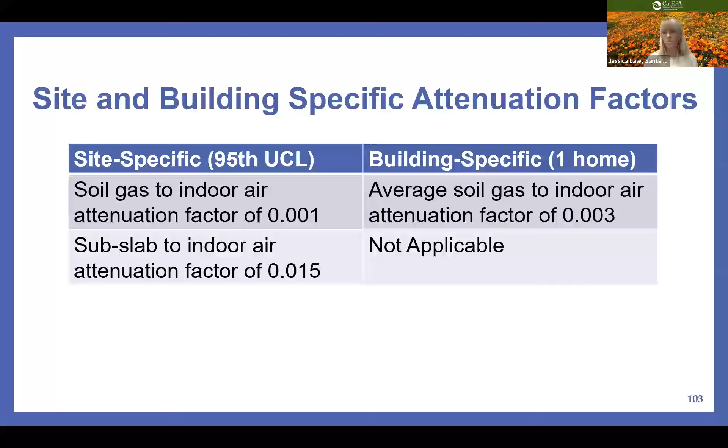All right, next slide, please.

The final scenario covers a situation of when is coincidence more than coincidence? Here we have 14 homes sampled on one street, again a really large vapor intrusion indoor air investigation area, with 14 homes sampled over the course of several years.

Detections in 4 highlighted homes occurred over a span of several years because they participated in the vapor intrusion investigation at different times. At first glance, with the first home that had an exceedance of TCE in indoor air, the conclusion was not vapor intrusion but an indoor air source based on lines of evidence. We drew the same conclusion with the next home. But when 2 more homes had exceedances on the same street for the same COC, it was important to lean into the additional lines of evidence a little more.

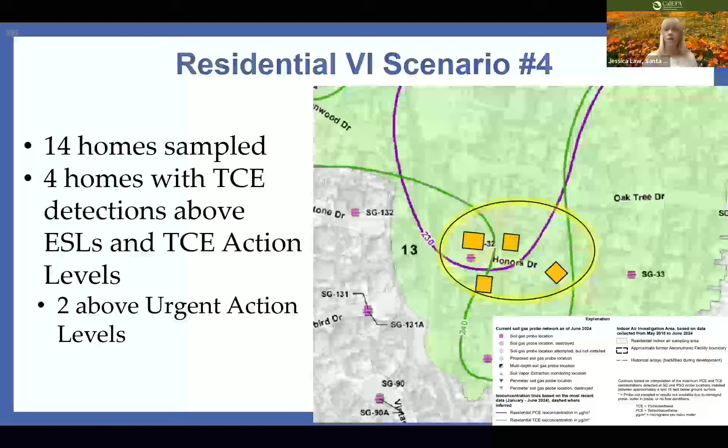We did this because this location is within the former facility, near areas of historical known subsurface impacts that were historically remediated. The soil-only closure allowed the site to be rezoned from industrial use to residential use, so single-family homes reside over these areas. Knowing this and identifying this cluster of homes with TCE exceedances, we had to look at multiple lines of evidence to support our conclusion. As regulators, it's our responsibility to ensure the protection of human health and the environment, and for scenarios like this, it's important to evaluate the uncertainties.

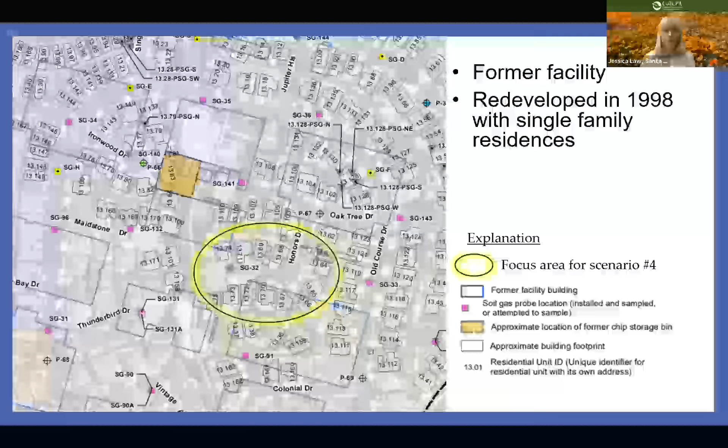So, next slide, please. The first line of evidence was the building survey. Some of these homes had identified potential indoor air sources, including a house cleaner and recent remodeling and painting, but not all of the homes had identified potential indoor air sources.

Next slide, please. Another line of evidence we looked at was the fact that detections were sporadic. Considering all of the homes with exceedances, it was identified that detections were sporadic and often the confirmation sample results were below the reporting limit. This again led us to believe it wasn't vapor intrusion, but there was still uncertainty, so we were looking at the other lines of evidence.

Next slide, please. We were also evaluating indoor air results compared to sub-slab soil vapor concentrations. Because of access limitations, we could only get one sub-slab pin installed, and it was located in the garage, so it's not a solid line of evidence, but it is useful. We evaluated those sub-slab concentrations against what was identified in indoor air, and if both COCs were identified in the subsurface but not in indoor air, it was another line of evidence supporting an indoor air source.

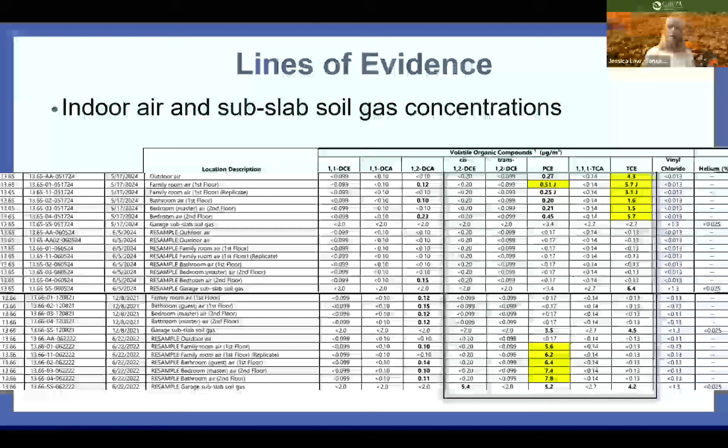Next slide, please. Since the sub-slab results were limited, we needed to rely on nearby soil gas probes as well. We evaluated plume stability and concentration trends for results collected from both 5 and 15 feet below ground surface near these homes. These results indicated decreasing concentrations for both PCE and TCE at both 5 and 15 feet below ground surface.

All right, so the last line of evidence that we looked at was actually evaluated earlier in the indoor air investigation process and was tied in with the first home on the street that had the TCE exceedance. Since this location is the former facility, remediated in the 90s, and for the first home, the TCE exceedance was in the bathroom, there were some uncertainties.

So we looked at the sewer pathway. Air samples were collected from the manhole nearest the home and from the upflow and downflow directions of the sewer, and these samples all came back as non-detect for TCE.

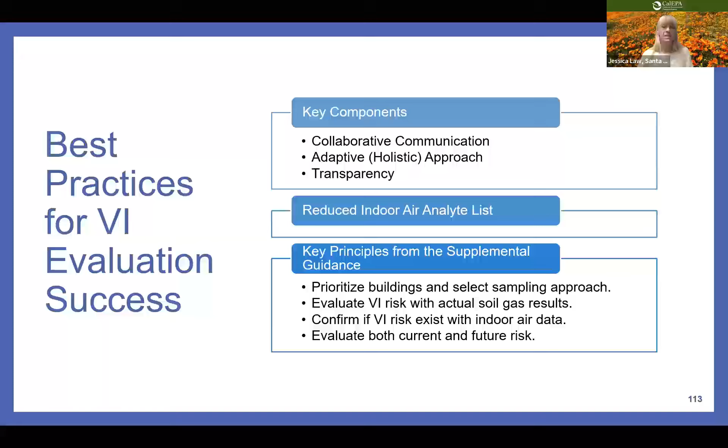Next slide, please. So I just want to close by highlighting how we utilized the key principles of the supplemental vapor intrusion guidance and other relevant vapor intrusion guidance documents to conduct the vapor intrusion investigation, which ensured quality data was collected and used in those human health risk assessments that were later generated.

Now, I do want to point out that if vapor intrusion was identified, we went straight to step 4 of the supplemental vapor intrusion guidance and made risk management decisions to implement short-term mitigation measures as necessary. Now, the results from the human health risk assessments, which included current and future risk, are what were used to develop and support the cleanup strategies and path forward for the site.